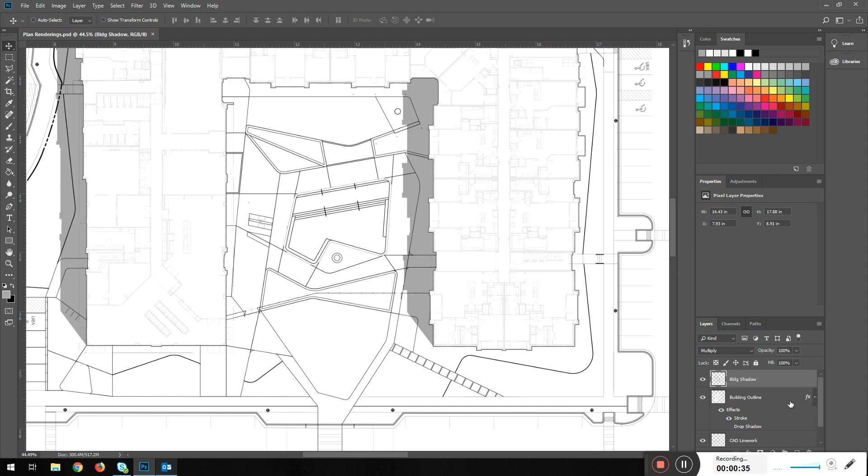I just wanted to share how I kind of quickly do these Photoshop rendering processes. So the first thing I do is I import the clean line work from AutoCAD, and in this one in particular I exported the building outline as a separate layer so I can manipulate the shadows and outline individually.

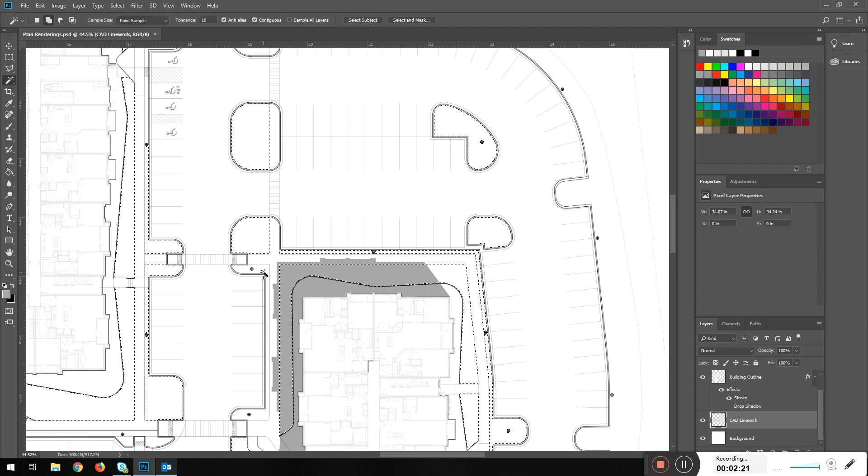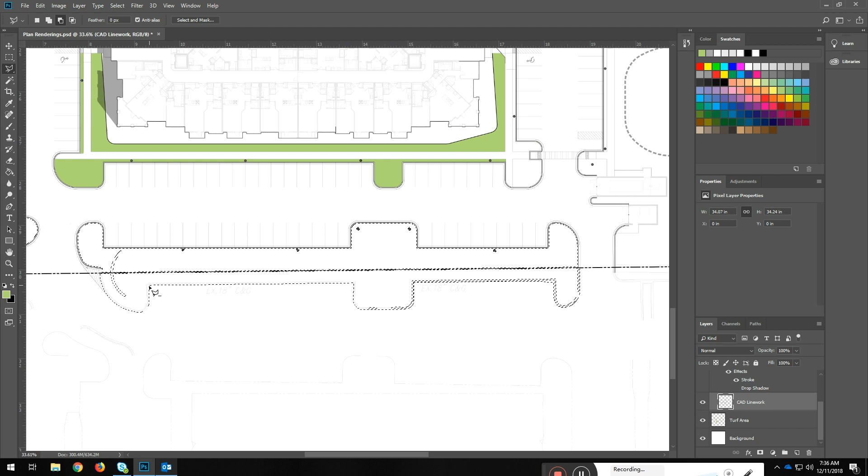So here what I'm doing is I'm just going through and magic wanding the different areas - the turf areas, the pavement areas, the sidewalks - and I'll fill them with either a color on their individual layers, so later I can come through and manipulate either as a pattern fill, or if I need a unique or individual texture, it'll give me the clipping mask that I need.

You can see here some of the lines weren't clean, and the existing line work wasn't quite clean, so you had to do some cleanup. Use the magic wand and just your marquee tool to clean that up.

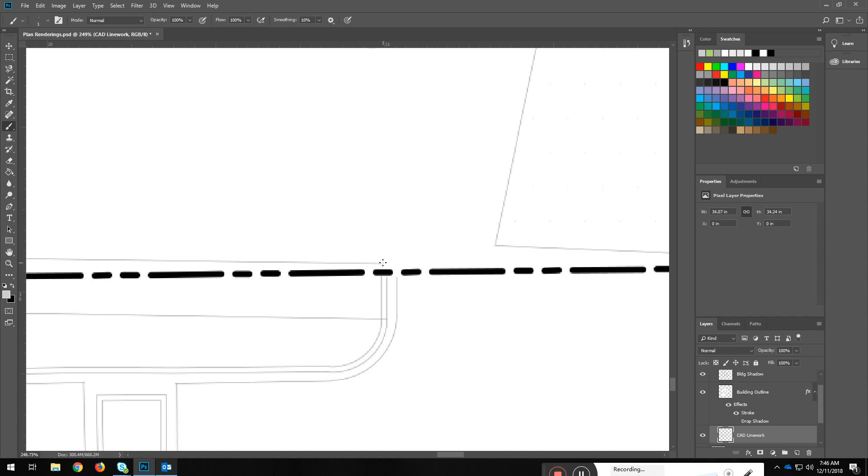So this whole rendering took about 2 hours to do. I sped it up, I think 200 or 300%. I don't always act like a crazy cracked out computer manipulator, although I have been told that I zoom in and out too much. Must be getting a coffee or something here.

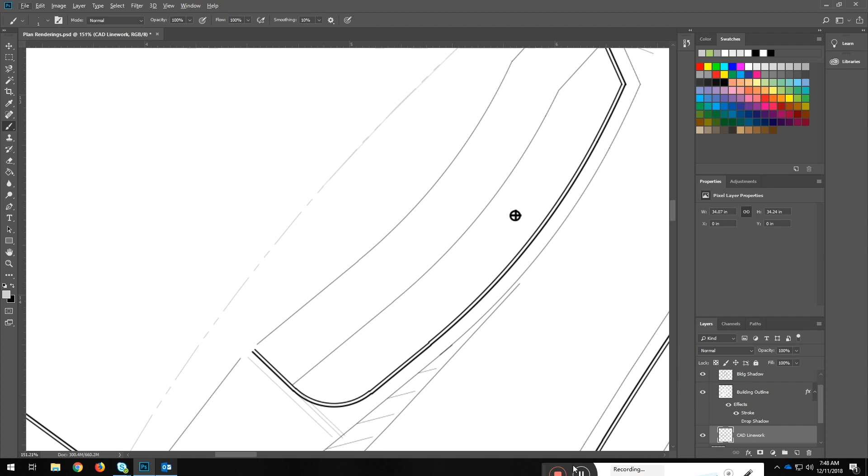So basically what I'm doing here is I'm magic wanding and it's not window selecting what I want, so I have to go through and just kind of manually close out some of these poly areas. If anybody has any better ways of doing this, by all means, I'd love to hear it.

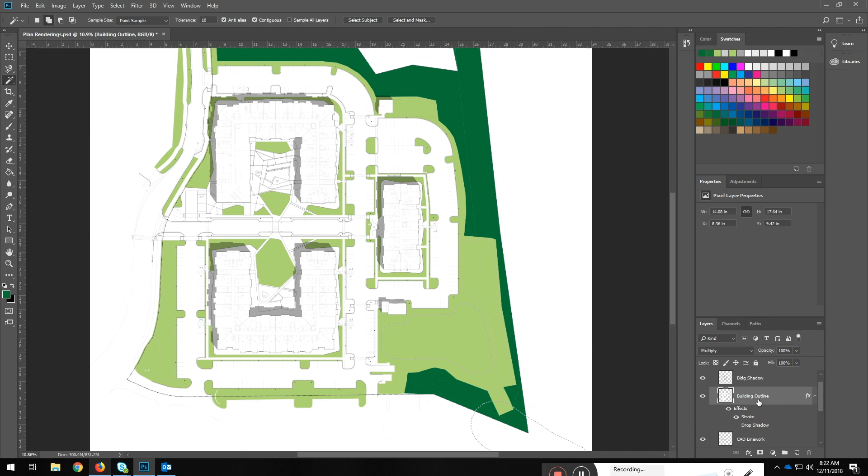I feel like I need to talk the whole time, but I guess I don't.

So the colors I'm filling with don't really matter so much. Basically these just become clipping mask or pattern overlay fills, so whatever you want to do, whatever floats your boat on these things.

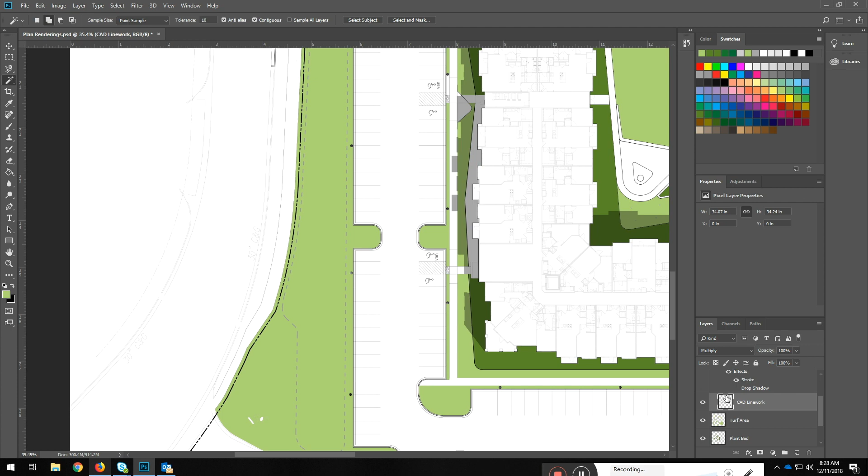I'm about to have a seizure watching this.

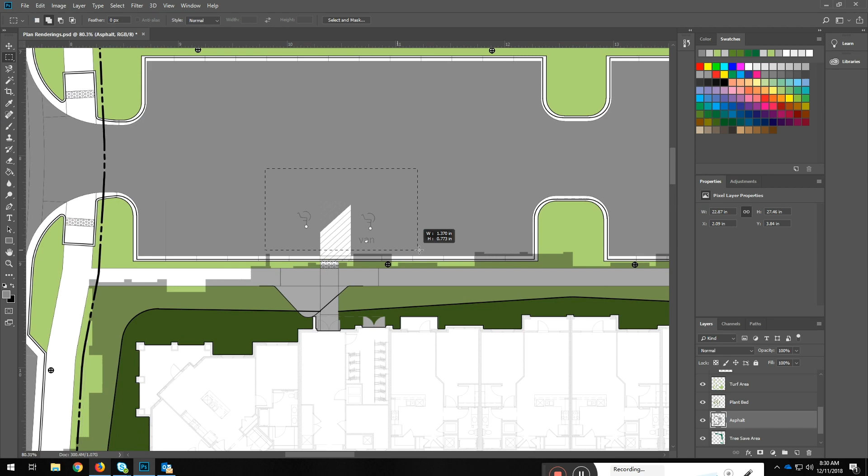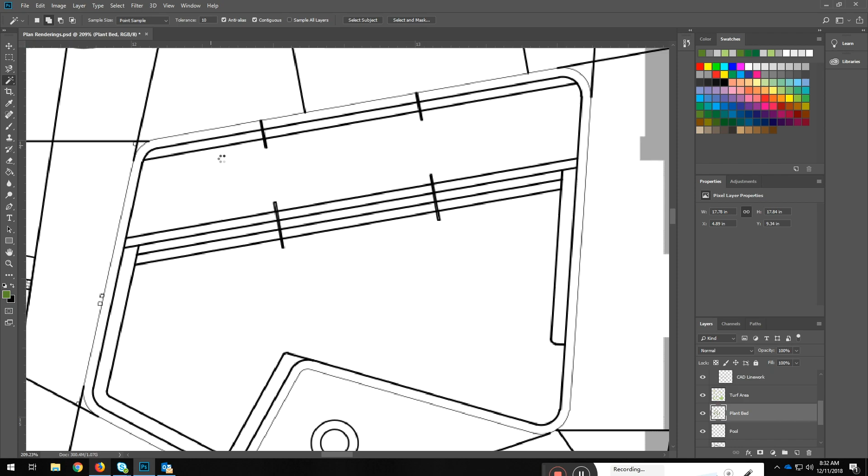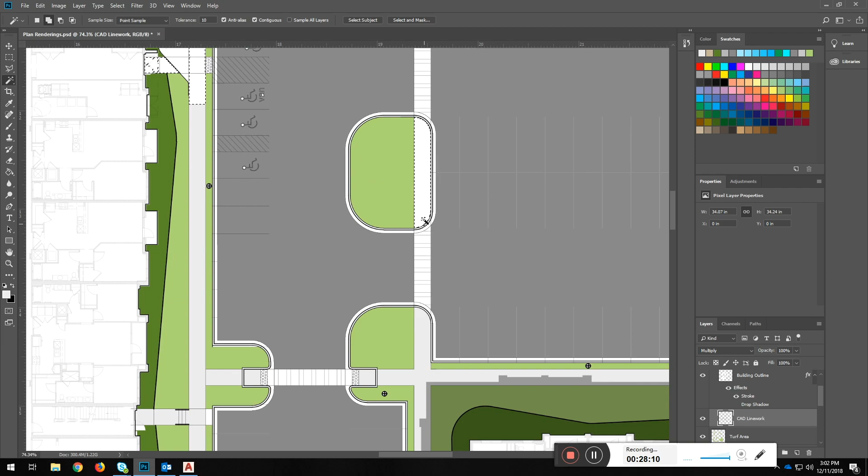This looks like I'm doing some last little bits of cleanup here with the concrete sidewalk.

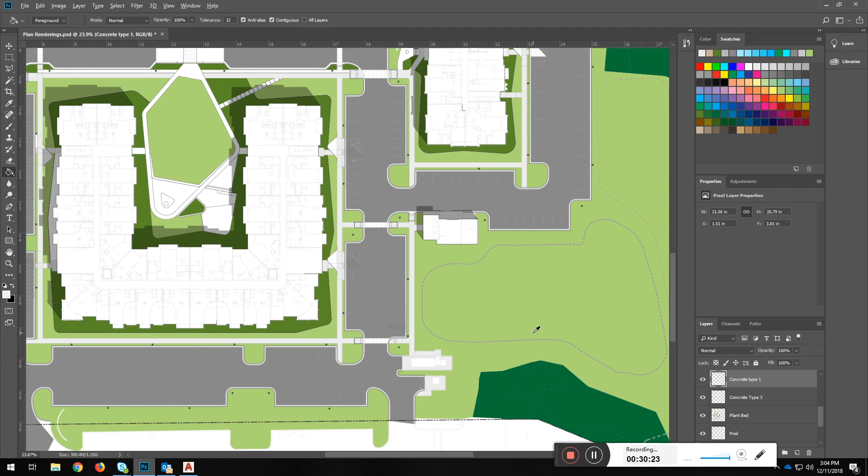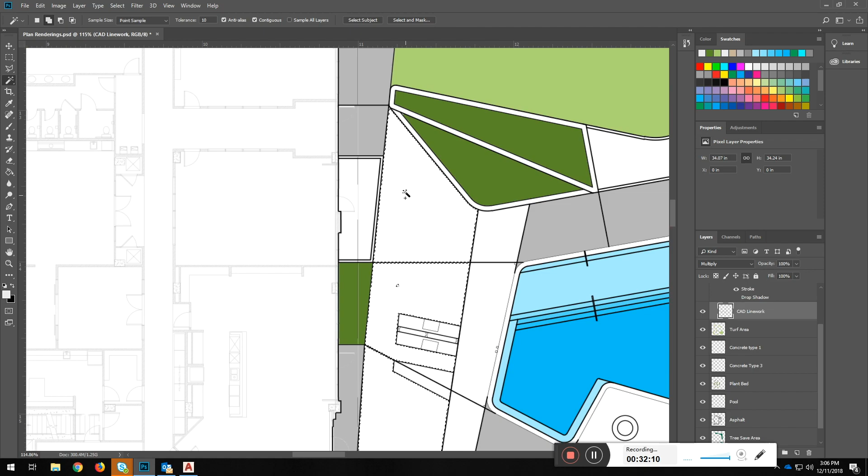So basically this is already set up, and we have kind of our 60%, 80% CD set in place. So we're using the CAD line work from our drawing, and then also kind of our materials plan as a reference. So we have different types of concrete finishes and paving materials - those are the different colors that you're seeing within the hardscape areas.

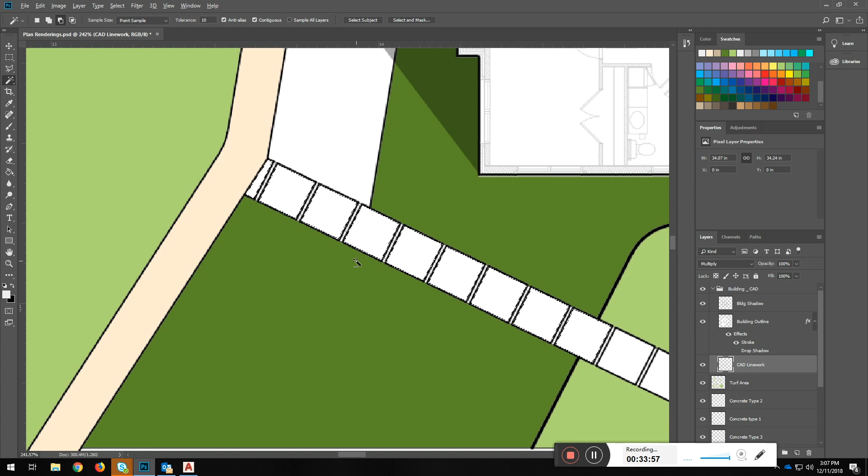So getting everything separated out is the part that really takes the longest, I think. It's also the most annoying to me, at least.

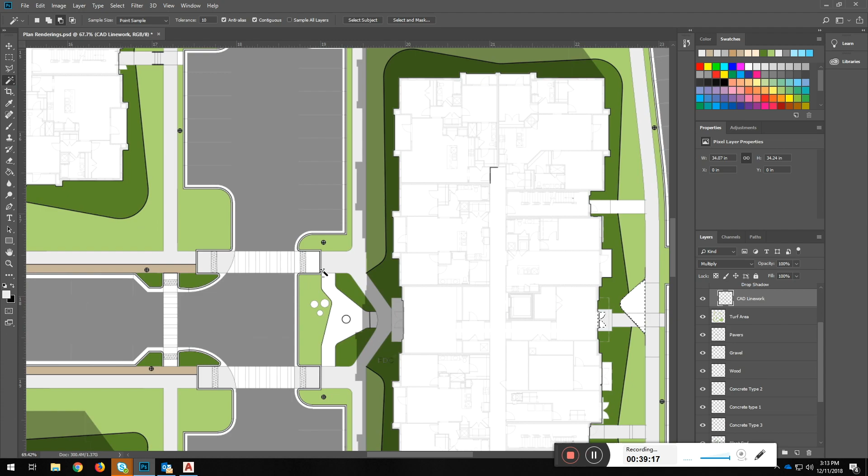There we go. It's starting to look like a rendering, huh?

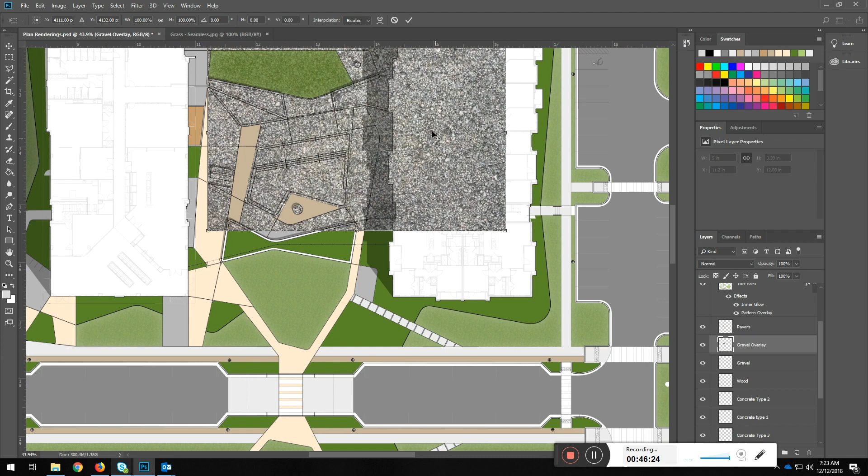All right, so here I probably should have just done a pattern fill or pattern overlay on these things, but I wanted, I guess, for some reason to do it the hard way. So again, I just overlay that gravel texture everywhere it needs to be, and then just use the fill I had bucket filled before as a clipping mask.

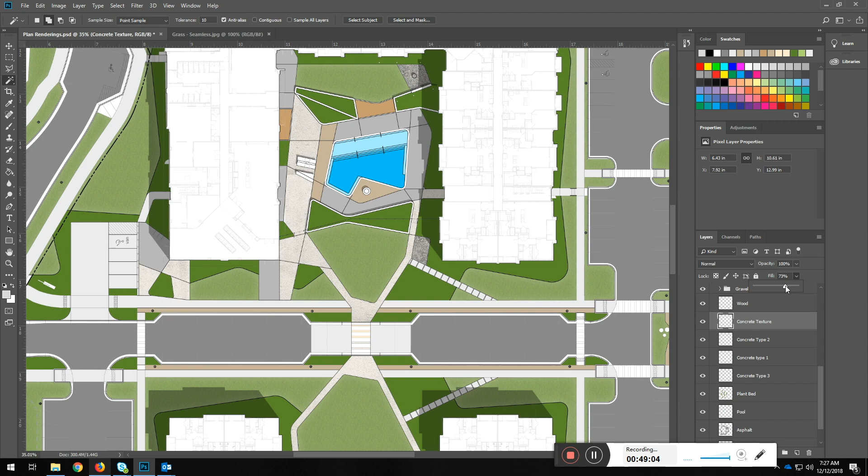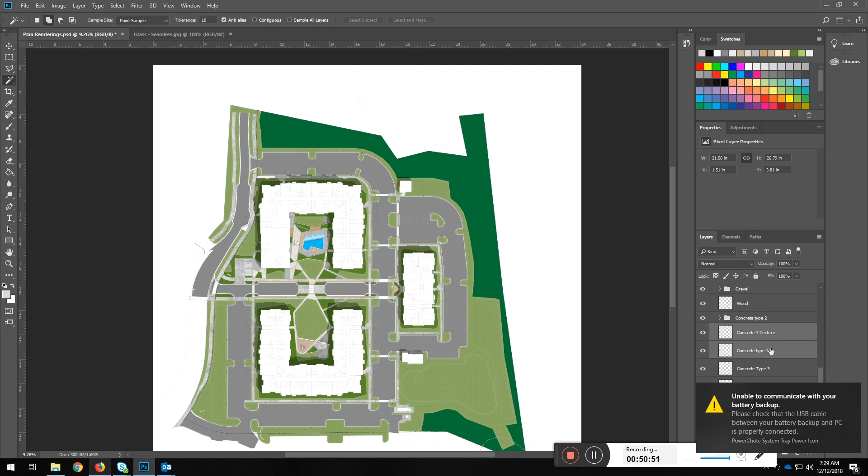So I'm grabbing these textures. Some of them I have saved, and most of the time I just pop over to Google and literally Google 'concrete texture' or 'gravel seamless' or something like that. I haven't been keeping a library - several years ago I would have a Photoshop library of textures and things like that, but it's just as fast to pop over to Google and get that stuff as it is to browse to wherever that folder was. So that's how I've been doing it.

This is a kind of funky little project, working with a client out of Philadelphia. It's an apartment project in Charlotte.

Organic orthogonal. That was the concept that we came up with.

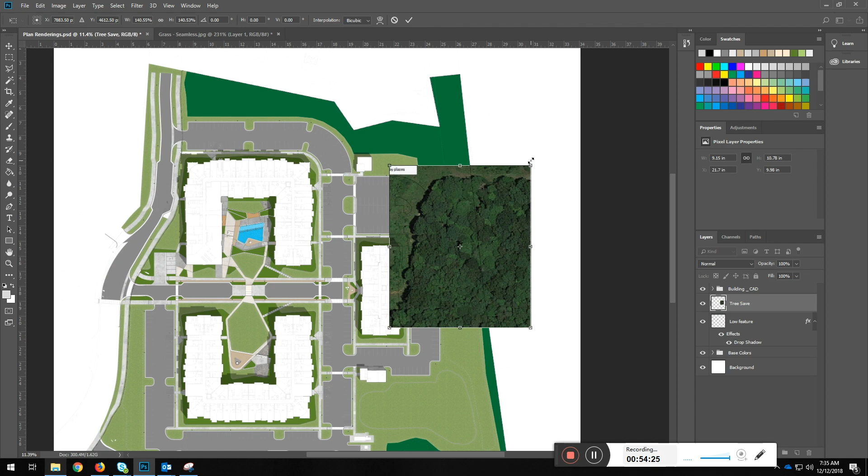So here, I don't know if I end up liking how it turned out, but basically what I did is I panned around on Google Earth until I found some trees against a field. And for the tree save area, that dark green you're seeing right there, I thought it would be neat to use actual aerial view of trees in there.

So I'm using that clone stamp tool to just sort of grab that shadow line along the edge, making sure that the direction matches the direction of the shadows I've been putting in so far. Kind of from the bottom right, just stamping that stuff around the edges. I think it ended up looking okay. Let me know what you guys think, or if you have other ways of doing that.

So I'm taking just like a... Oh, the other thing I do is I use masks to do these edits. That way you can just put it back if you make a mistake. I used to just straight up erase that stuff.

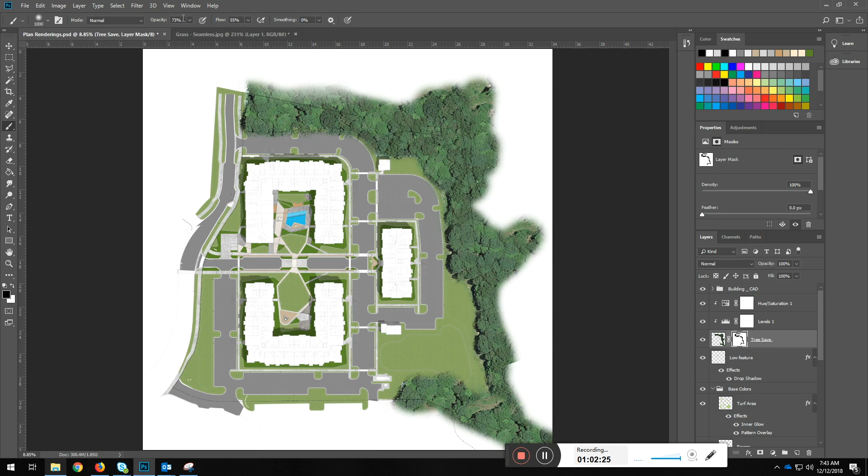Oh, and then you can see my thinking here. I was going to go around and erase the backside softly, and then I'm just like, well, I'll do it at the property line, just make a nice clean line.

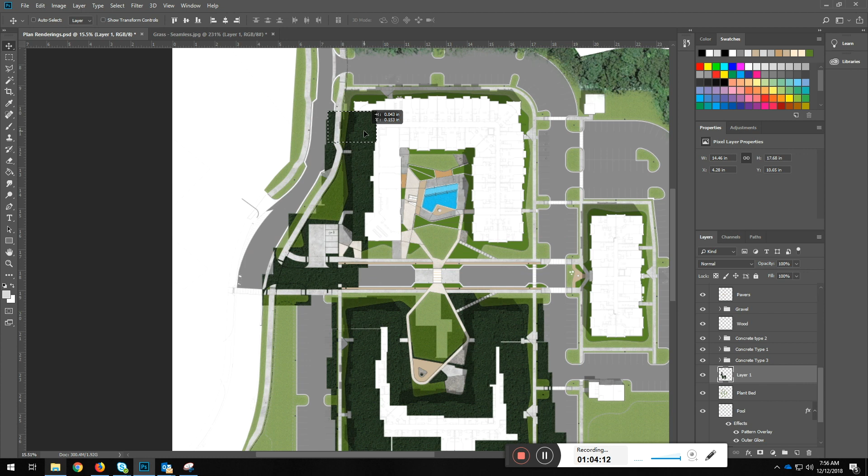Alright, so then I went and found a nice pine forest in Google Earth. It's sort of a plantation pine, so they have that kind of formal texture to it, the little dots do. Just messing around with it as an overlay, I think it gets the point across as a plant bed. Again, not spending too much time on the detail.

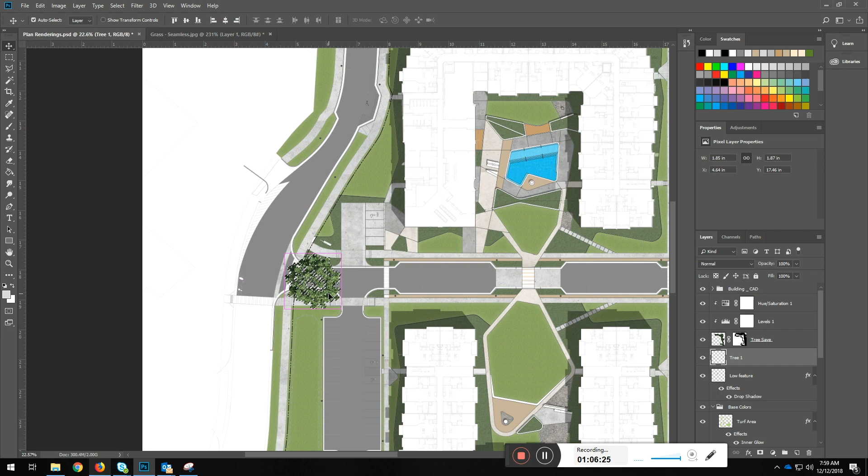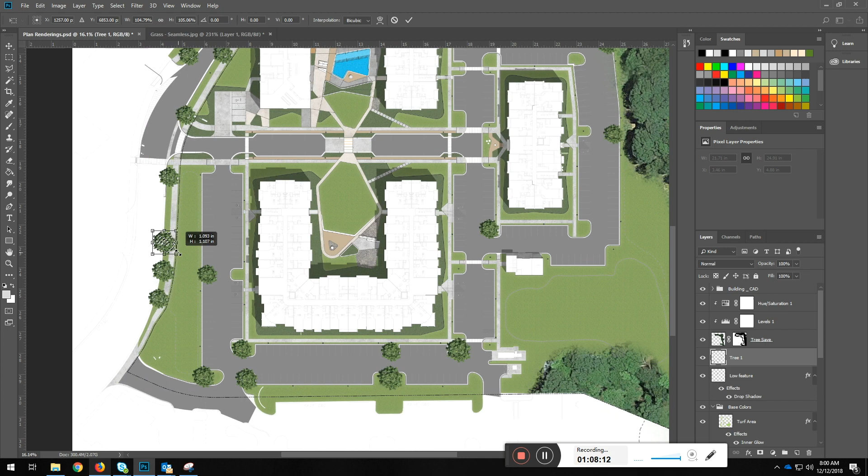So for this tree, I think I googled plan view tree or tree from above. Typically, if it's a marketing rendering, I'll go through and pick two or three different trees, and I'll also manipulate the size of each one and maybe some color properties, so it doesn't look like I clone stamped everything around. But for the purpose of this rendering, it's just trying to convey mostly material and ideas, so I did manipulate the size a little bit, but didn't spend much time on that. So just copying these bad boys around.

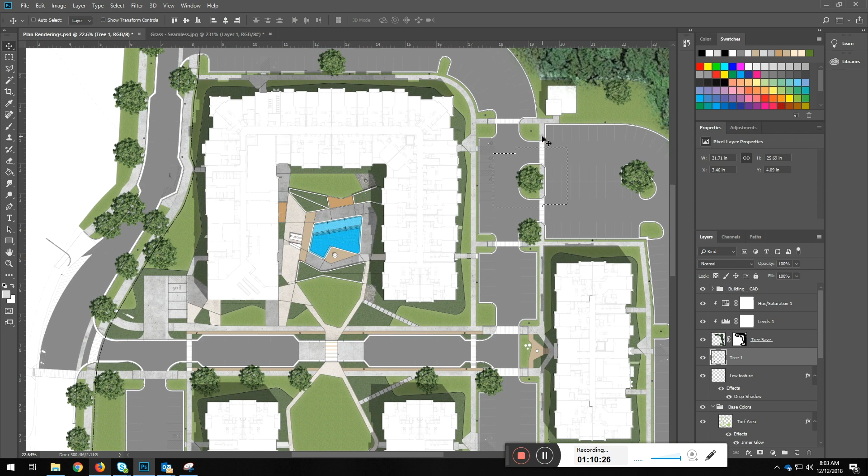Interesting thing, after I finish this rendering, we got comments back from the city that we had some of these trees too close to the building or too close to the utility, so we're going to have to go through and rethink our strategy a little bit.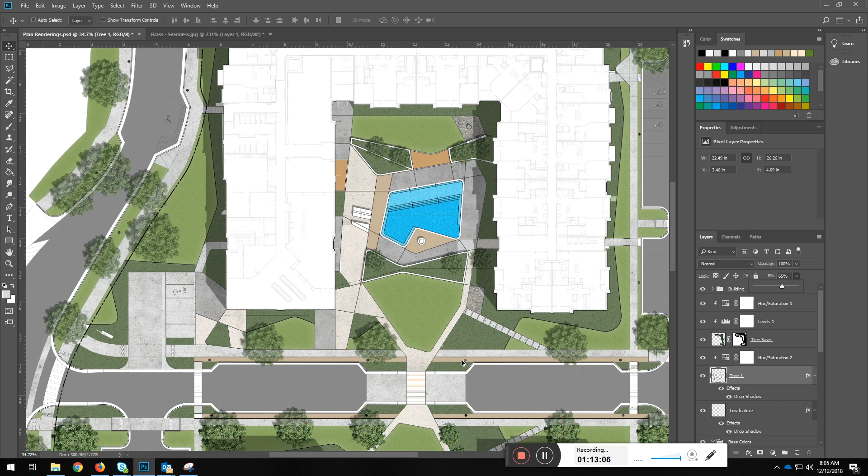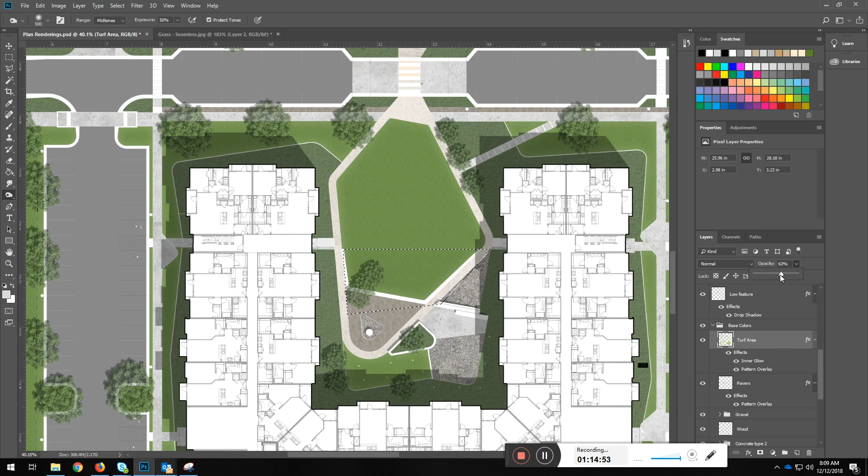Huh, whoops. Looks like in that south courtyard I left some trees in the middle of the field there. Huh. How in the world did I not see that?

So here I'm just going to that grass layer and adding a little bit of highlight and shadow just to softly indicate that there's some topography going on.

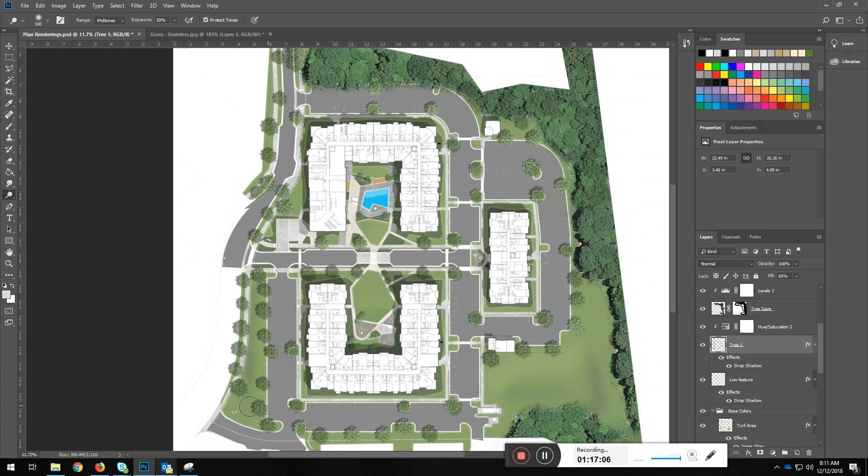Now what I'm going through and doing is lightening up some of the trees again, just to add a little bit of variation so that it doesn't look like I copied the same tree around, which I did.

And now going through, and again I just googled wood deck texture or wood texture. Some cleanup there.

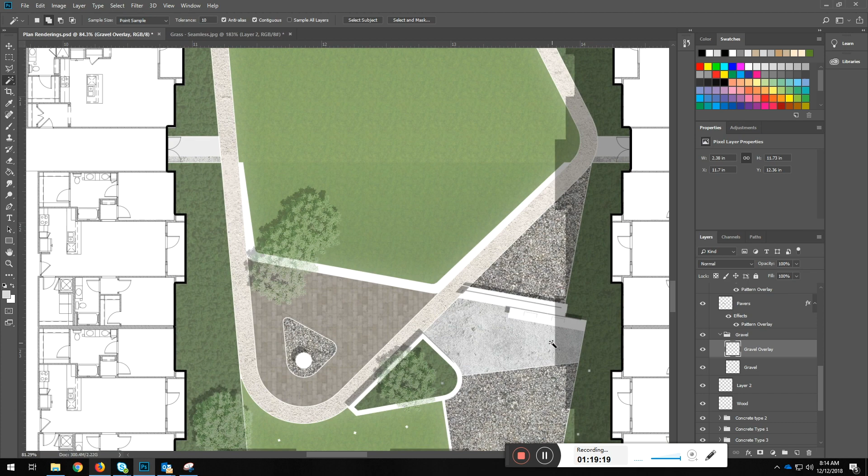And narrating this is stressing me out. You'll have to let me know how I did. I rarely listen to stuff with sound anyway, though.

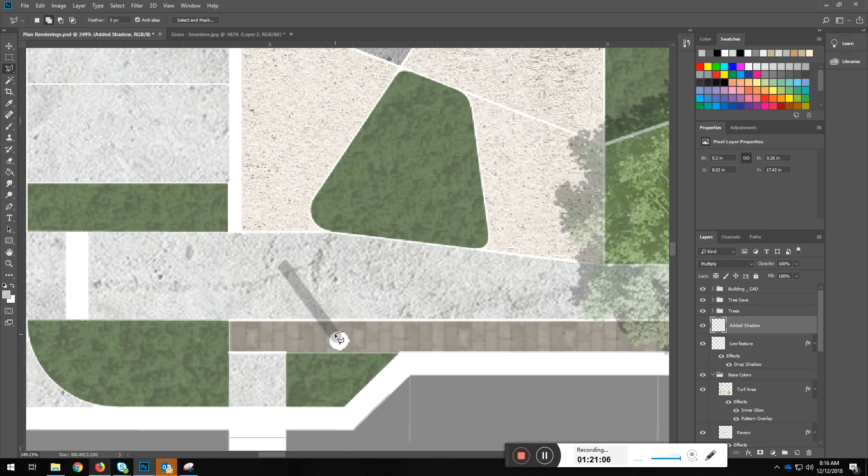Alright, so here those are street lights. Basically just copying around the shadow to add some dimension to the drawing. Well, you know what I should have done?

I should have put a little drop shadow on that pavement texture.

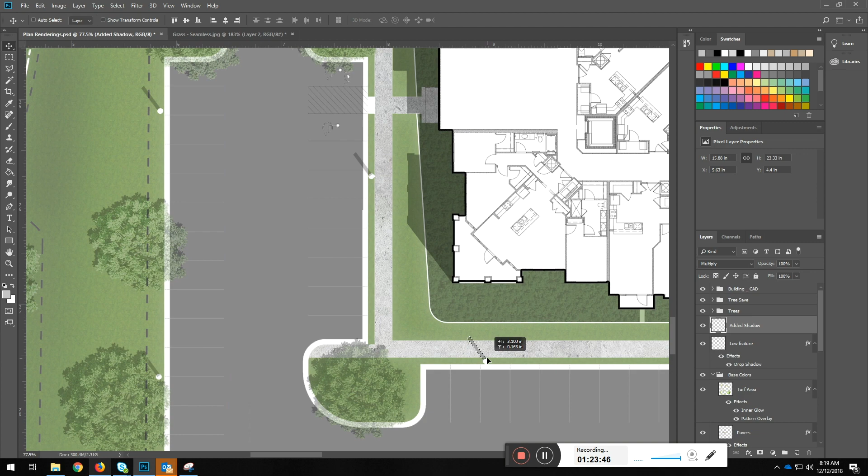Then you can see that it's not a super clean rendering. Quick and dirty.

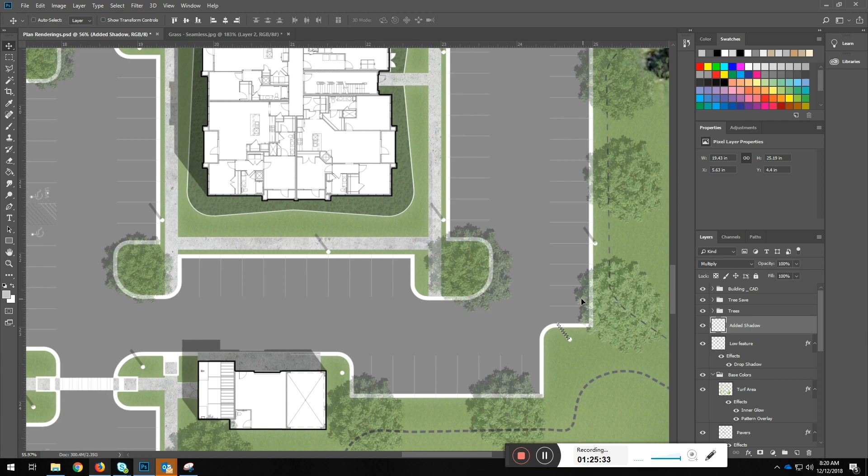Also, for some reason, I got these fancy new Apple AirPods things, and it's not letting me use them to narrate this. So I'm just talking at my computer right now.

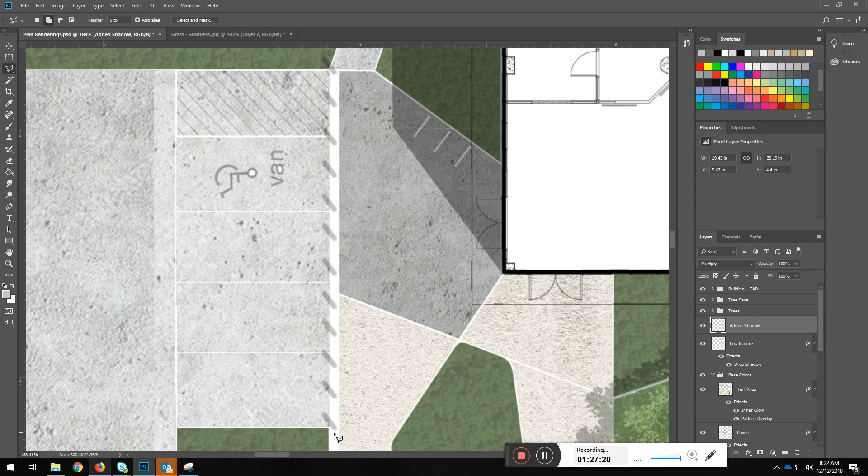So here, just adding shadow to some elements. Those are bollards. Add some to the pool, inside of the planter walls.

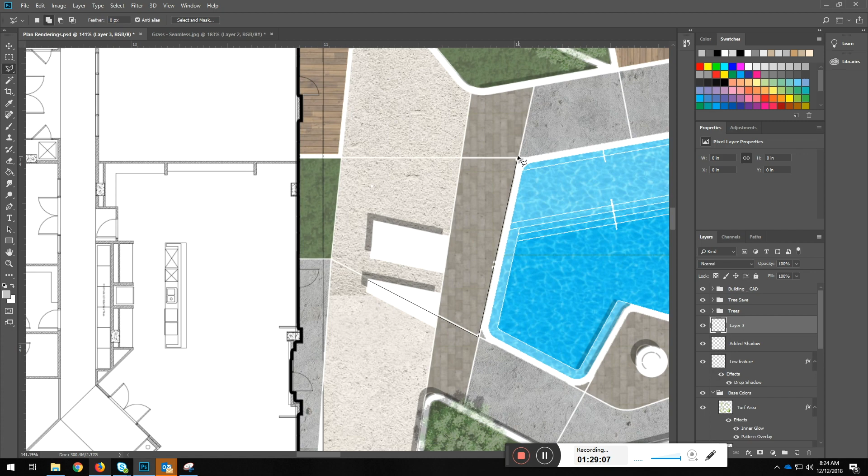So with the hand drawing, and then also with computer graphics, the lighting and the shade make a huge difference in the drawing coming to life. That added dimension or depth.

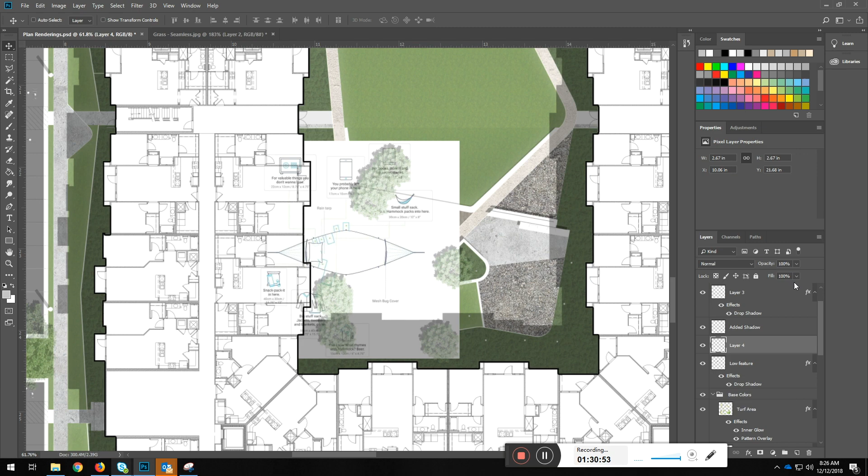There you go, so this is my typical process. I'll just Google whatever I want to put in there, and for this one I'm just using it as a reference, our little hammock grove over here. Just put it in there and then trace over it. There's a hammock post.

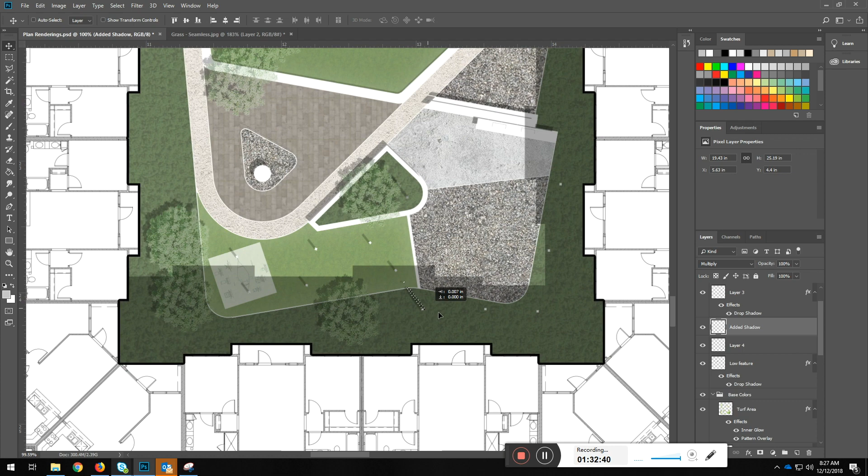It's driving me nuts that I didn't see those trees right there in the middle of the south courtyard. Gotta fix that.

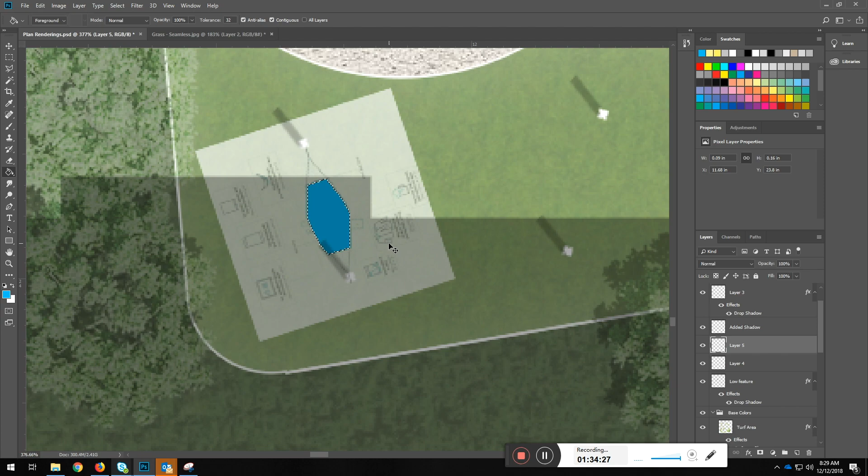Decided on blue hammocks for now. Add a little bit of shadow. Lighten up, darken up. Alright, and that's about that.

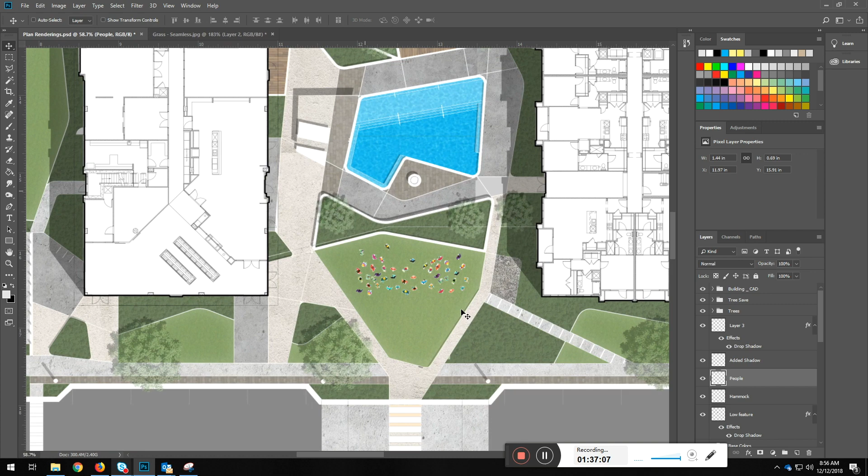Oh, forgot about the people. Typically, again, I spend a little bit more time, but I think this makes a big difference in bringing the rendering to life. Also, the other thing I didn't take the time to put in here is the site furnishings, so the pool lounge chairs, benches, bike racks, and all that stuff.

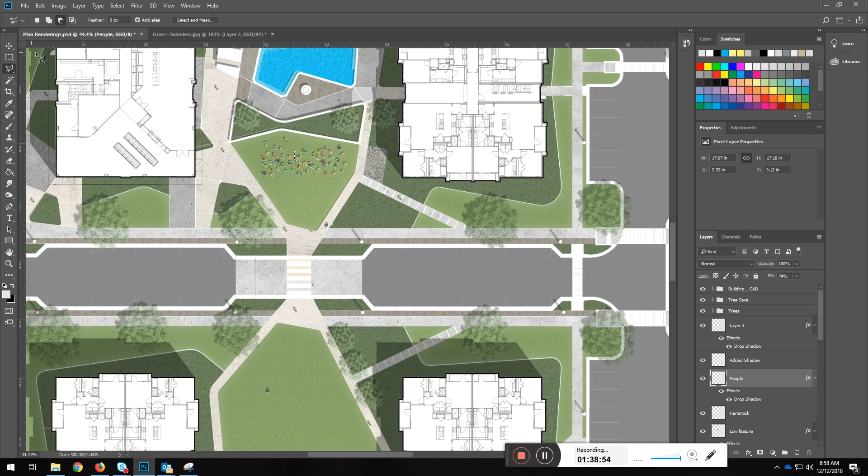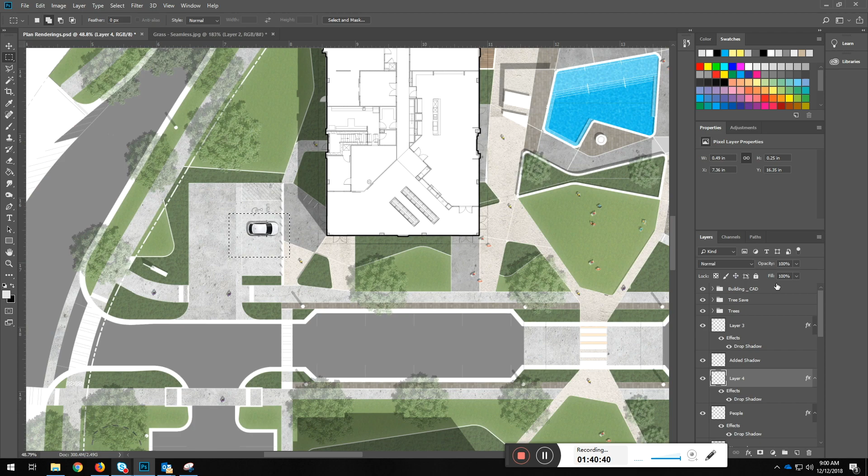There's a car. I was feeling ambitious and was going to fill the whole thing up with cars, but then I was like, I'll just put a few in here. Alright, anyway, let me know what you guys think.